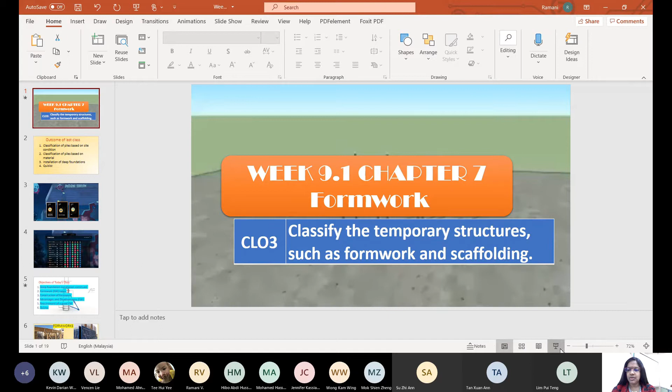Today's class is on formwork, right? We will have two sessions today. Number one is the formwork class, and then another one on how you feel about this course. Your appreciation and clarification questions, whatever is related to any matter in this module, you can ask and I will reply immediately. If I can't reply immediately, I will post later on. We'll do that in the Padlet later on. Let's start with this class today.

Meanwhile, in between, I plan to give you a briefing on another coursework. Okay, this module will have 5 course learning outcomes. We have completed 2 of them. Now we are going to do the third one: classify the temporary structures such as formwork and scaffolding. It will be a separate outcome that is expected out of this module, right?

In olden days, it was content based, how much content you learn. Nowadays, it's very specific to the outcome of each class, if not each class, at least chapters: what you learn with respect to that particular chapter. So today's class, I try to complete formwork, and scaffolding will follow next class, because each one has about 50 to 80 slides. So I may take 1 or 2 classes for covering this CLO.

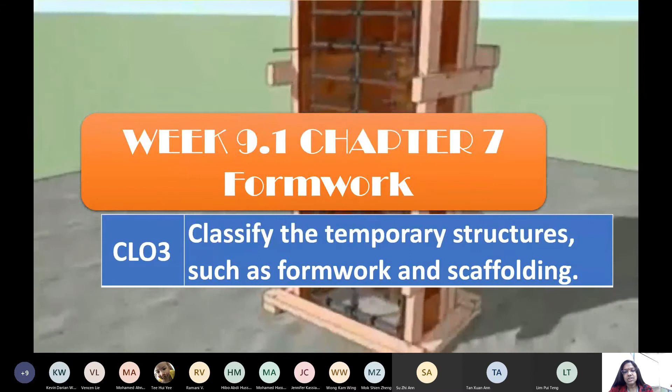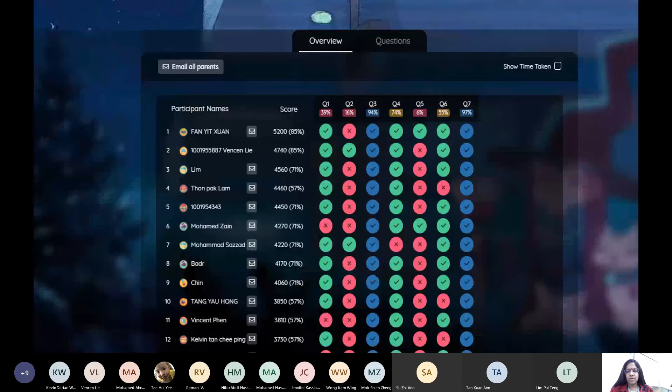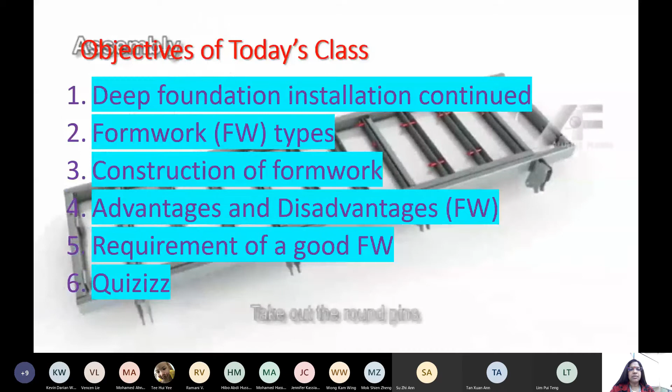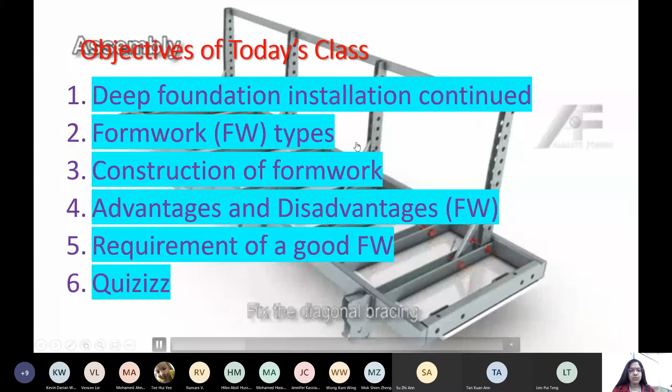Classify the temporary structures such as formwork and scaffolding. Formwork is the one which is forming the structure. One moment. Objectives of this class: construction, deep foundation installation continued. I will do this by reviewing your quizzes from last class. Then formwork, the types of formwork, construction of formwork, advantages and disadvantages of formwork, requirements of good formwork, and Quizizz. Quizizz, if we have time, we do today. Otherwise, we will finish with Padlet.

Can you all hear me? Yes, ma'am. Yes. Okay.

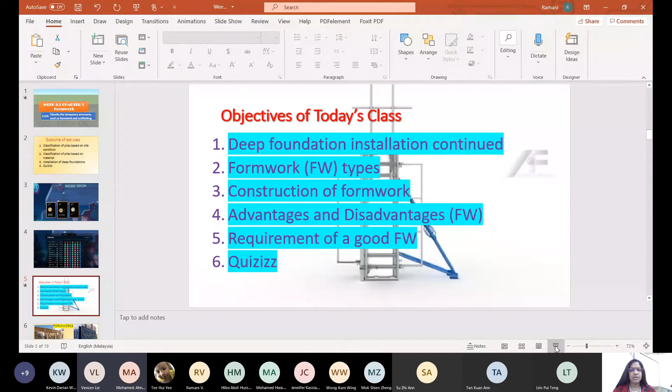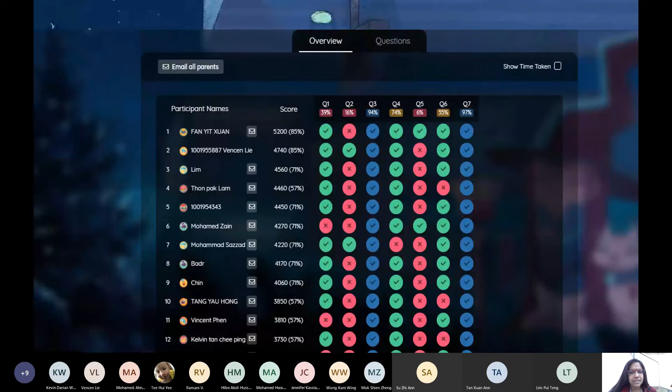Let's do a quick review of last class quizzes. We had 3 people on top. Number 1 is Fan Yit Xuan in first place. Second, Vencen Lie. Third, Lim. Give them a big appreciation by joining your hands. Then the first 10 places in our class on the topic of deep foundations: Fan Yit Xuan, Vencen Lie, Lim, Thon Pak Lam. Please give your name whenever you participate, so that we know each other. Mohamed Zain, Mohammad Sazzad, Badr, Chin, Tang Yau Hong, Vincent Phen, Kelvin Tan. These are the people at the forefront. So try to beat them. Actually, Fan was 3rd or 4th during the session and suddenly jumped to 1st place. Appreciate. Okay, good. Let's proceed with the class today.

Formworks, right? Sometimes I use the board. I don't know whether you can see the board clearly when I draw. Can you answer me? We can see it clearly here. But my problem is I should see either the one you write on the whiteboard or the slide you share. Oh, like that. Okay, go ahead with my iPad. I'll try to manage with this today, then we will see how effectively we can use this.

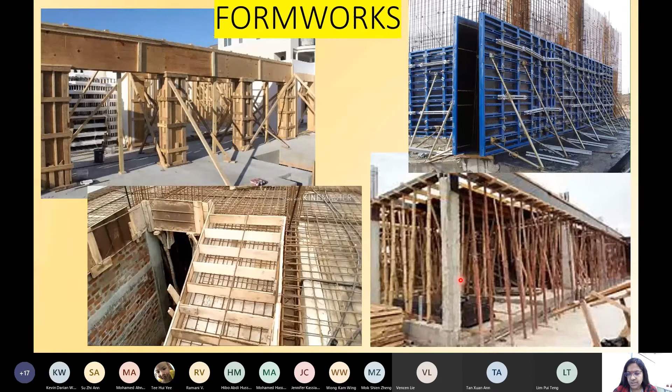Okay, let's come to the section of parts of a scaffolding. I may ask in your assignment or any of the questions, giving the structure, to mark the parts. Okay, just remember these words in English. It's common everywhere. Nowadays it's global, right? Whatever the invention, whatever the material, whatever the findings, all global. The one invented in Dubai, India is using, Malaysia is using, Singapore is using. The one invented in Australia, Netherlands is using, Austria is using. So there is no regional word used. You can use this as a common one.

All places they are called base screw jack, right? This one is the jack. What is this structure showing? Okay, this is the formwork arrangement, the formwork structure used for construction of maybe a slab here. They're going to construct a slab and a beam and column later on, right? Let's understand the parts of the formwork. Start with the bottommost, which is on the ground.

These are all temporary structures. No need of foundation; a proper permanent foundation is not required. So just put it on the ground, supported by this plate, the screw jack base, strong enough to hold the structure above, and then a tower frame, right? A tower, and then different columns are connected by these diagonal bracings, right? Because they're running diagonally, they call them diagonal bracings. At the end or in between the column and the slab or beam, the ends are called beam, the middle part is called slab.

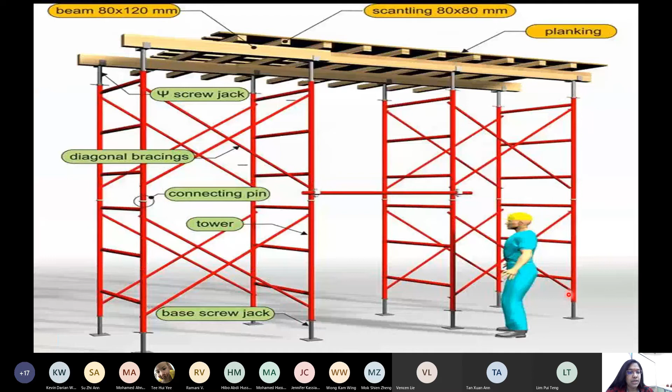These types also, last time you saw this as a pin. The ring pin, connecting pin. Now this one will be like this. I show one video in each class, the rest you please go through yourself.

This is for the column mold. This is they are going to construct a square column, almost similar. This is the mold used for constructing a column. That's why it's very high. It's a box type column.

And these planks are supported by how this column is made, by different planks. The small size planks are put together and they are joined together by these angles, locking pins. These plates are fixed or connected by these locking pins at the corners. At the corners of the square, the locking pins will connect and hold the column.

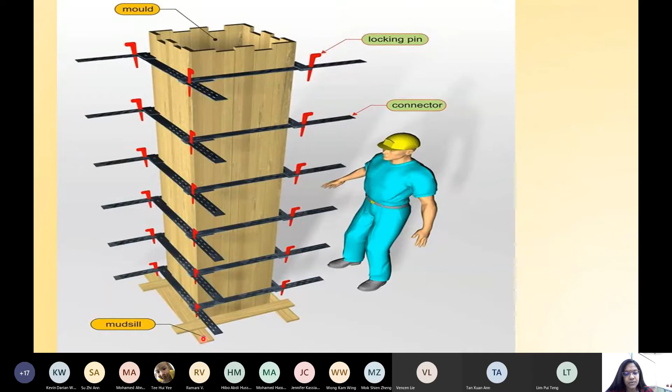At different intervals, stage by stage they build it, connect it using these flanges and the pins. The last one, the bottommost plate is called mudsill, connected like the last one - you have a jack plate at the bottommost. You have here the mudsill, just fixed onto the ground on soil, and then nailed or just fixed firm to the ground.

This is another type of holding, another type of fixing. You have this is a wall. The size thickness - can you imagine what may be the thickness of the walls that you are having? Maybe you take your home, what's the minimum to maximum size of a wall? Can you tell me the size of the wall? Anybody?

Critically, you must think critically, not just listening. 125 to 150. 125 to 150. You're saying partition, only partition. Okay, partially correct. Partition walls, the walls within the rooms within the house may be running about 150 to 200.

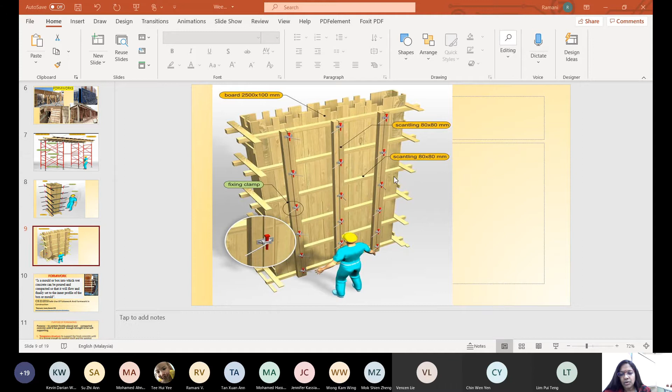That's the size of the wall and they're using here. So whenever you're using the scaffold beneath the formwork, care should be taken that you ensure you maintain correct size, fix it firmly, otherwise continuity is lost. Especially for construction of walls like this, there should not be any joints, breakages, or gaps in the construction. The formwork should be constructed such that the size is maintained, continuity is maintained, no gaps, and material is filled properly.

This is another type of pin, a fixing clamp. They use it as a clamp, and they have a common padlock, like a padlock. They just use a common pad, and then a clamp is used to lock it.

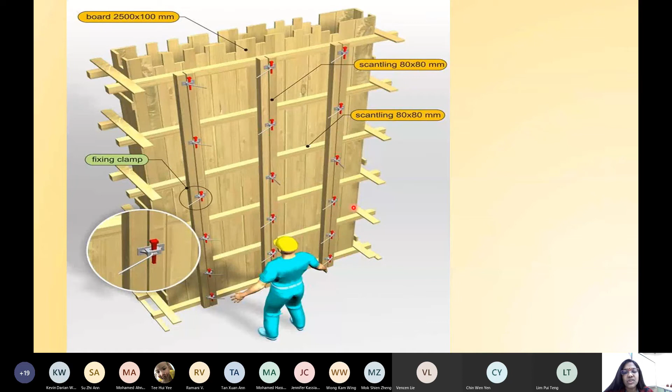All these things are connected by this clamp, fixing clamp. Then it's a mold or box into which wet concrete can be poured and compacted so that it will flow and finally set to the inner profile of the box or mold.

See here, one of the structures. This is foundation because you're seeing below the ground. This is the ground surface, maybe used for pile construction under the ground. They use the formwork.

Into the mold, after making a formwork or mold box, you pour the concrete inside and wait until it settles down. After curing time, say for example, depends on the concrete grade, from 3 days up to 28 days, depending on the structure and the type of concrete.

Which type of grade is it, and the proportion, 1:2:4 or 1:4:8, something like that, depending on the material and the elements, the concrete grade will vary, right?

It's a mold or box, so that it will flow and finally set to the inner profile of the box or mold. So they pour the concrete inside such a way that they fill and occupy the whole end to end of the boxes in all directions, and this is the code you can refer to if you have any doubt.

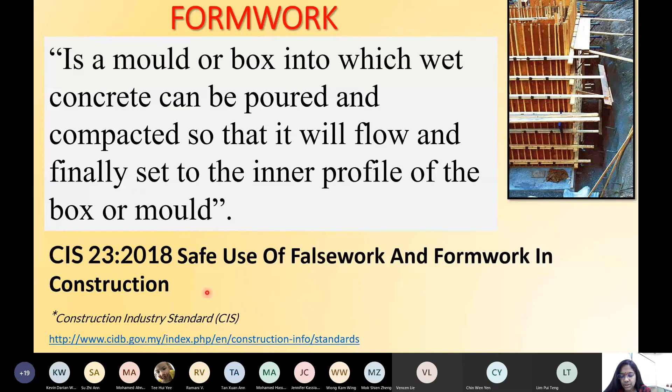Okay, for more reading you can go through. They have given all the criteria, norms and standards for using these types of falsework or formwork. Purpose of formworks: purpose to contain - it is to contain freshly placed and compacted concrete until it has gained enough strength to be self-supporting, right?

Only if it is settled, it can self-support. Then there's no point in keeping this temporary structure there. You can remove the temporary structure - you have a finished final product of your beam, column or slab.

So these are temporary structures to support the fresh concrete until it is strong enough to support itself, reaching the strength of the concrete and the applied load.

That's important. The purpose of making your concrete beams or columns is to support the load, overcoming load, right? It may be static load or dynamic load or any type - starting from wind load, earthquake load, self weight, and all the live loads coming over the building have to be supported by these types of structures.

So depending on the type of loading, depending on the type of location, it will be changing. So you ensure that you achieve this strength by constructing the particular member, and the purpose of bearing load is ensured or achieved.

To produce a concrete member of a required shape and size, we use formwork. If there's no form, no definite boxes or mold, it will go into a different or irregular shape and size.

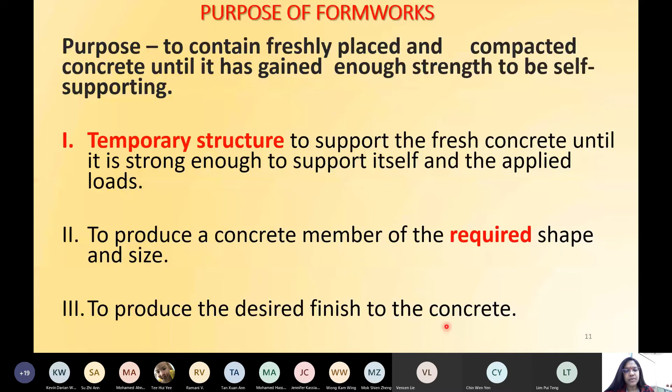For that, you should use proper formwork for achieving the size and shape, to produce the desired finish to the concrete. Not only the size and shape, but desired finish - a smooth surface, a straight surface, a uniform surface for better view, a better architectural view, and then also for other works like finishes. When you apply finishes, you won't incur more cost on the finishes. It will be good enough if you have a uniform surface made out of this concrete by using these formworks.

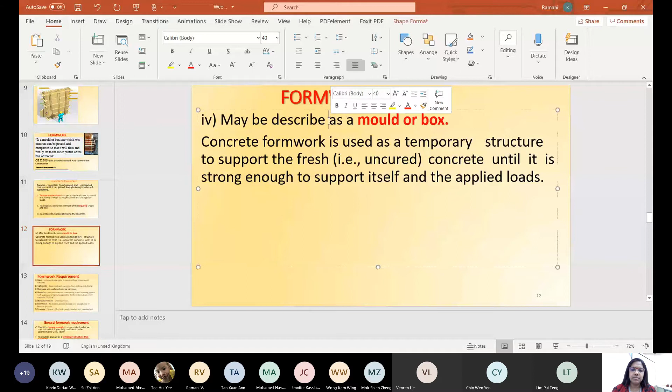Concrete formwork may be described as a mould or box. It is used as a temporary structure to support the fresh concrete until it is strong enough to support itself and the applied loads. You have to wait until it settles, and then only you can remove your temporary boxes.

Formwork requirements are also most important for your learning. What are the requirements of a formwork? You cannot just build it like a layman. It should be proper, especially since nowadays you are getting many types of materials. Whenever you go for new or modern materials, make sure all these requirements are fulfilled. I collected this from 3-4 sources and put down this information as a comprehensive summary for you.

There are only 7 requirements: rigid, tight joints, shrinkage and swelling should be minimum, simplicity, standard size, form finish, and economy. In future, one of you, like our friend Fanit, may do research on new innovative material for formwork - make sure all these 7 conditions are fulfilled. The material should have tight joints, be economic, and have a standardized size, because size also matters. Depending on the loading, sizes vary, and the strength of the formwork follows. If it is not strong enough to hold the concrete, it will collapse, and the whole structure will collapse. So make sure all these conditions are fulfilled. It should be rigid to prevent bulging or movement.

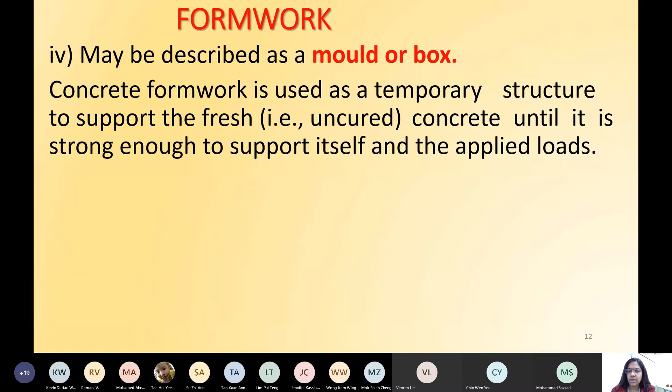It should be rigid to prevent bulging or movement from pouring wet concrete. So it should be rigid, strong enough to withstand the load - people moving, right? Sometimes on the first floor or second floor, people are moving, and it should be able to bear the weight of people moving, coming and pouring the concrete. As the height goes, the weight will be changing. All these things should be managed, strong enough to hold, by the formwork that you design.

Tight joints are needed to prevent wet concrete from leaking, and to keep it strong. At joints, there are chances of leaking. If you have tight joints and smooth finishing, you can avoid such leakages and wastage of concrete.

Shrinkage and swelling should be minimum. Material-wise, due to dry and wet seasons, there is a chance of freeze and thaw. You should be able to decide what type of material it is, whether it can withstand this shrinkage and swelling with respect to the climate. Then, simplicity - easy erection and dismantling.

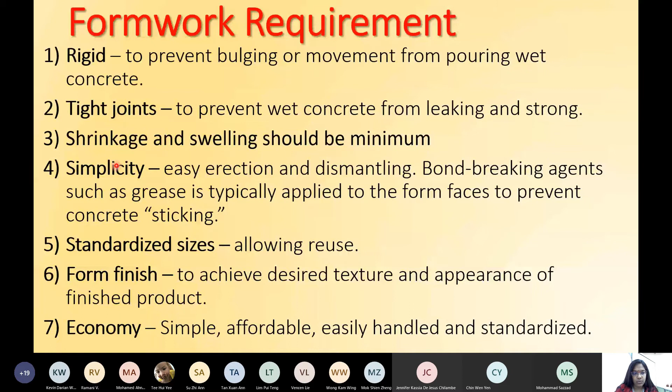Okay, in the first place, if you fulfill this requirement there is no problem, right? If the form has a smooth, uniform finish, there is no need of grouting or any leakage. You can avoid leakage by having smooth joints, perfect joints. You can avoid leakage and any difference in size and so on.

Same goes here. What if you have a joints problem and it is not tight? Grout tight means grouting is an operation to remove all the gaps, the air pockets, mainly the gaps at the joints. So grout leakage can cause honeycombing. If there is any gap or holes at the joints, it will form a type of honeycomb.

You know the honeycomb, right? Have you seen honeycomb? Small holes, which is ugly, and that will yield poor strength of concrete. There is a chance that the structure will fail through these honeycomb portions in the concrete. So you have to avoid honeycombing caused by loose joints. You should have tight joints and avoid honeycombing, and then it will start forming fins, spreading, and that has to be removed, right?

Grout leakage can be prevented by using sheet materials. How do you remove this type of defect in case it is unavoidable and it has occurred? Number one, you should identify it. If at all you cannot make a good finish with perfect joints, check the joints, right? Check the joints.

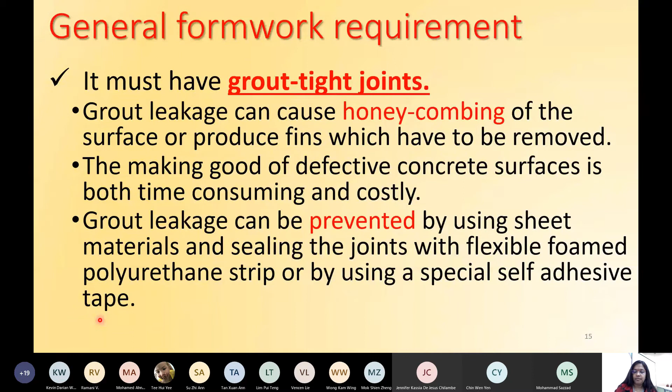General formwork requirement. It must not be able to deflect under load, which would include the loading of wet concrete. Just now we studied, it should be capable of withstanding all types of loading coming in, right? It should not deflect, change, move, dislocate, and so on when you pour concrete. It must be accurately set out, right? Accurately set out. Size should be correct.

Concrete being very soft when placed, it will take up the shape of the formwork, right? That's the purpose of formwork. So if you are constructing a 4 by 4 beam, your formwork should be 4 by 4, not even 1 mm differing. It should be exactly 4 by 4, right? So when you pour concrete, you will get a 4 by 4 beam accurately set up to the size you designed.

Concrete being very soft, it takes up the form, which must therefore be of the correct shape, size, and in the right position. Because it is going to take the shape of the beam, right? The ultimate product, the beam or column. You should mind the shape, size, and positioning of the formwork. The example I want to show.

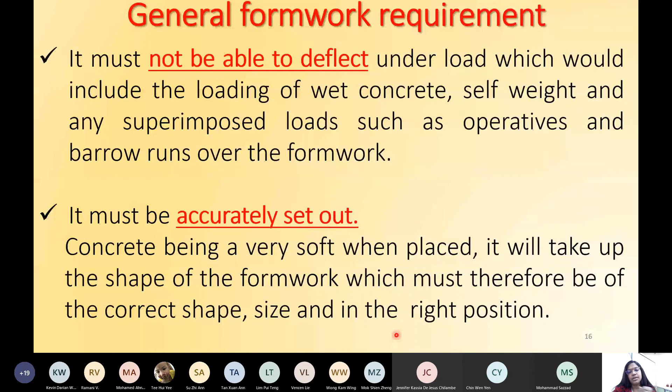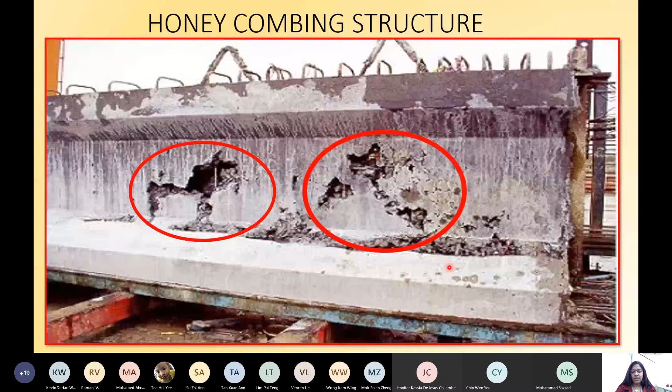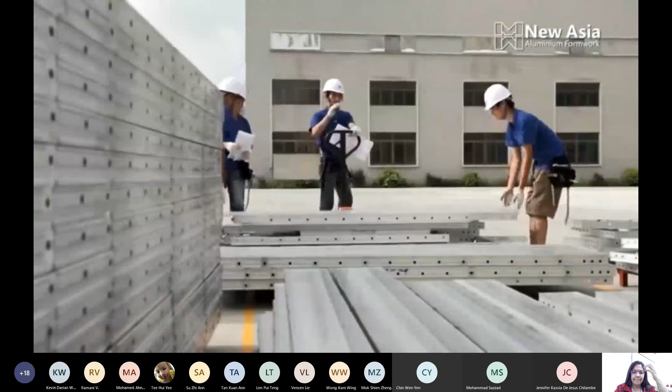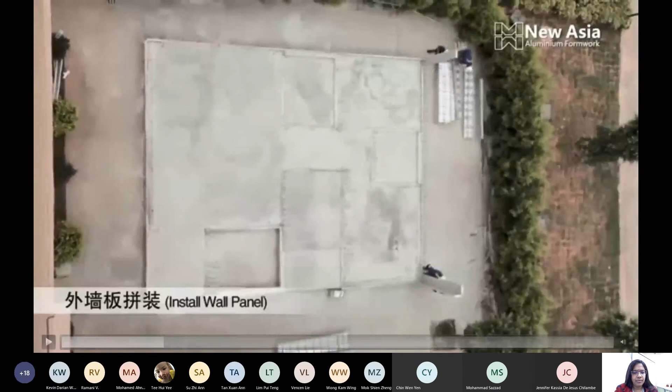There's a video based on this formwork. Please listen to this one. One moment, I will share it. It's a nice project in China. That's why I brought it here. You can go through. You can see, right? One moment. You can watch later, but this is repeating somewhere.

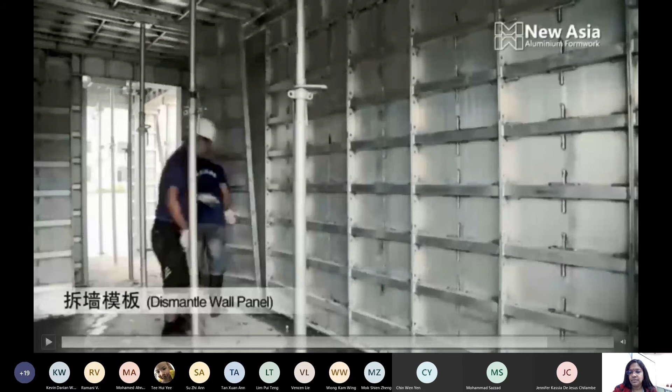Thanks for watching the video. Can you tell me what things you saw in the video? Are you hearing me? What things did you saw in the video? One by one, quickly. Hello? They poured some mold oil. Installing formwork. Aluminium formwork. Very good. They use aluminium. They pour concrete, and there's another answer. Quick, one by one.

Dismantle the formwork after setting. Okay, by mechanical means, like just unscrew it or break it, right? Break the pin or unscrew it. They open it. Any other things you saw in the video? Important thing. They coat oil on the formwork. Apply the oil purposely so that there is clean removal, and when removing, it will be easy to remove. Oh, very good. Next, chemical, it's not oil, chemical. Any other? Quickly, 2 more minutes.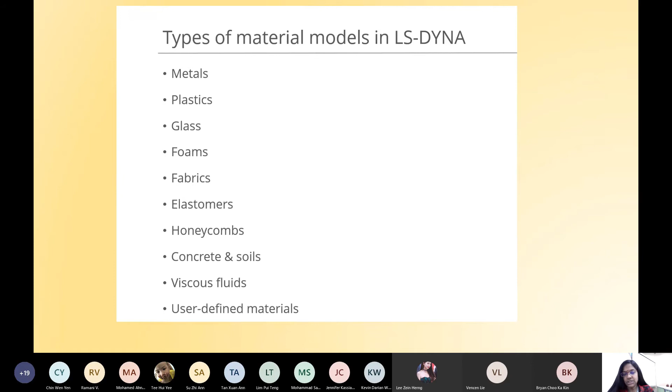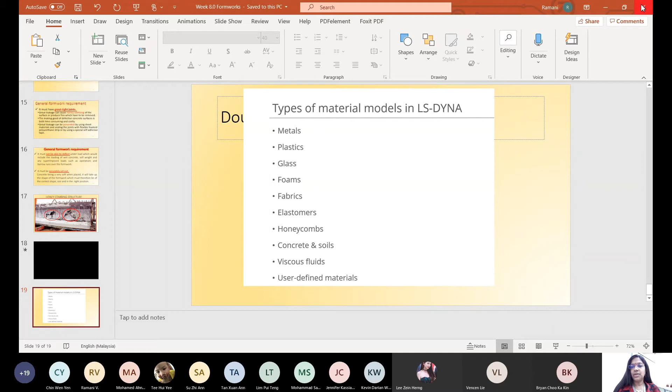Yeah. One moment. I open the file. Any questions so far? No question, ma'am. Okay, one moment. I take the next slide for you. Now we are going to see the requirements of formwork. This slide is over. Based on the requirements, it's all about construction only. Your slides are delayed. One moment. This is week 7, right? 7.1. Okay, I start from here. Requirements. I can't find the slide. Seven is not coming. One moment. I open from the folder.

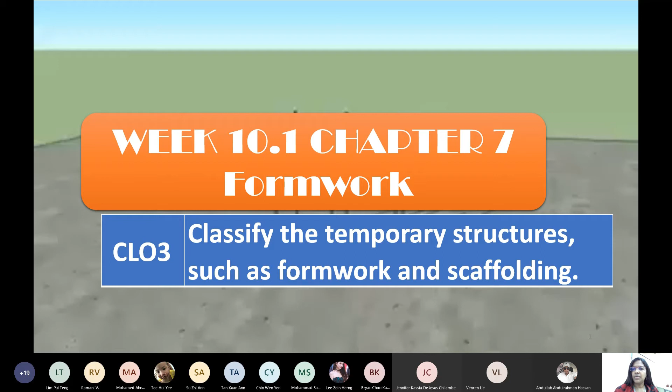You can't see the slide. Why is the old one always coming? I don't know. One moment, sir. The old slide is coming. What's happening? Give me a minute. I got it now. Maybe overuse of sharing. Right, we are here.

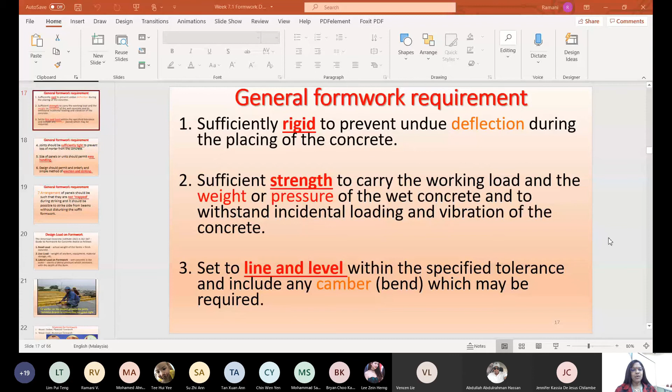General requirements, mainly for designing and construction of the formworks. Sufficiently rigid to prevent undue deflections during placing of the concrete. Sufficient strength to carry the working load and the weight and pressure of the wet concrete, incidental loading and vibrations, because after pouring concrete they use vibrators to consolidate the concrete, settle down the concrete.

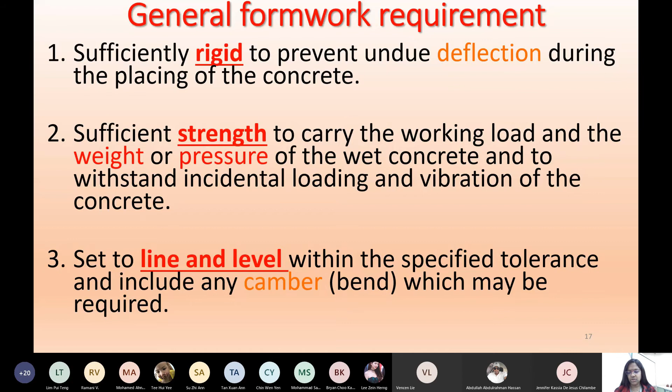Set to line and level within the specified tolerance and include any camber which may be required. So a smooth and uniform finish should be there. It should be in line and leveled, not undulated. If it is a wall, the surface should be leveled, not undulated. Joints should be sufficient. We already did this one, right? Maybe I put it in a detailed way.

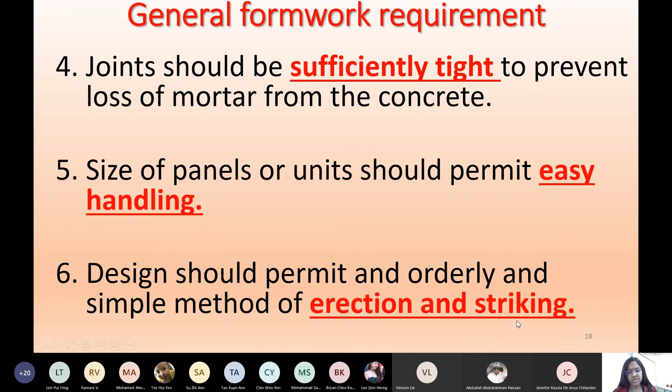Size of panel units should permit easy handling, erection and striking. Design should permit an orderly and simple method of erection and striking. So handleable, manageable, simple. Arrangement of the panels should be such that they are not trapped or leave any gaps during striking, and it should be possible to strike sides from beams without disturbing the soffit formwork. Soffit means the bottommost portion, which should be clearly finished, closed while striking one by one.

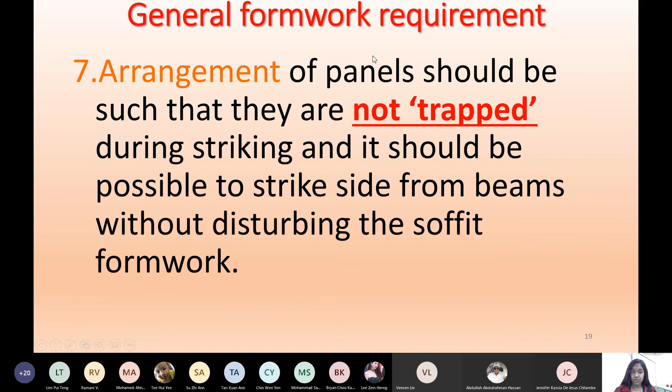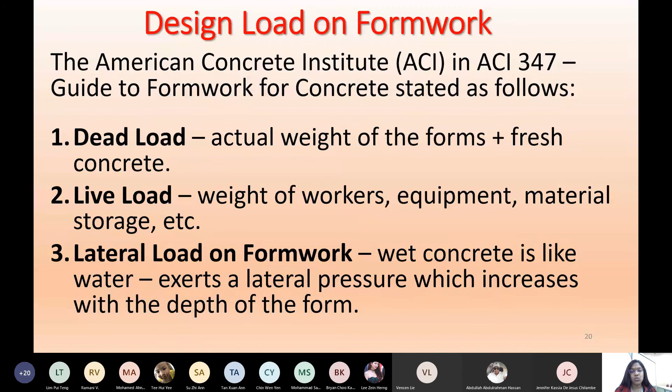As you pour, because it is a slurry form, liquid or semi-liquid, it will try to find ways to fill inside the formwork. Wet concrete is like water; it exerts a lateral pressure which increases with the depth of the form. It is not only static load, that is gravity load, that is applying; it is also lateral load while it is filling and increasing the load towards the walls. So it has to support lateral and vertical loads.

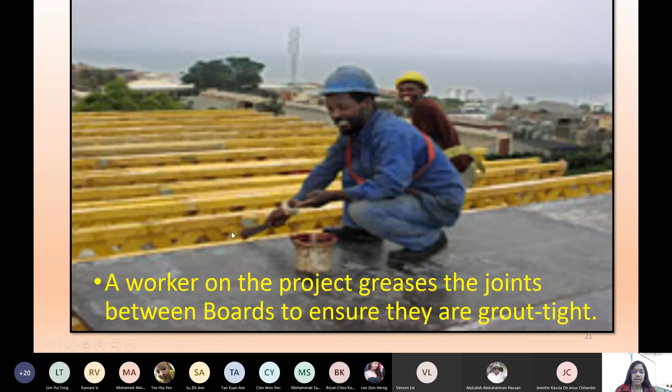What is he doing? Already written there. A worker on the project greases the joints. It's a formwork. He's greasing the joints so that the removal of formwork after the concreting will be easier. He's greasing the joints between boards to ensure that they are grout tight. Grout means a gap or loose joints like that. So it is grout tight, and then it is packed with the concrete later on.

Come on, let's classify the formwork based on the material. Let's understand what are the materials, what are the advantages and disadvantages. Now you are learning the theory, but when you go to the site, there are many things you need to consider. All types of ethical, technical, managerial problems will arise. You have to manage, right?

One moment, sir. This phone is ringing. One moment, sir. Give me a minute. Okay, sorry for stopping.

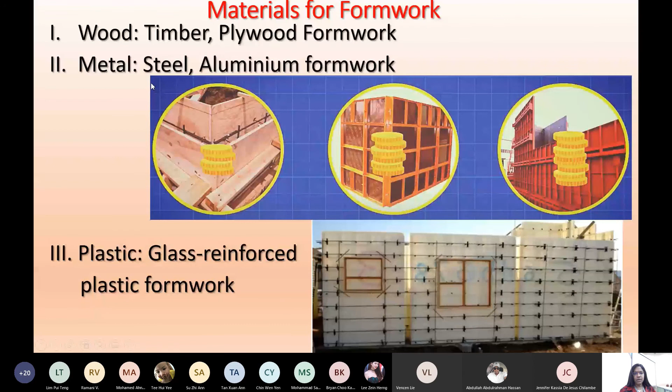Timber formwork. Let's analyze one by one: the advantages, disadvantages, the strength, they are varying. See here the example, timber. Using timber, they support the structure we're going to construct. Basic standard qualities of timber formwork: reasonable, affordable price, and readily available. Should not be so soft. Should be easily worked by hand or machine, or nailed easily. Workability, customizing to your required size, is easier. And should be stiff to avoid deflection.

The timber you choose has to be very stiff. Choose the right type of timber material; timber has many classifications. Should be stable when exposed to sun or rain. Not low quality timber, high quality timber, so that the weather and climate problems are not there. Should reduce defects, like honeycombing, or white patches on the surface after repeated wetting and drying. That should be avoided. Growth of fungus and so on.

Not suitable for green timber. Moisture content not more than 20%. So avoid green timber, and moisture content should be less than 20%. Up to 20% is bearable. More than that is difficult to manage.

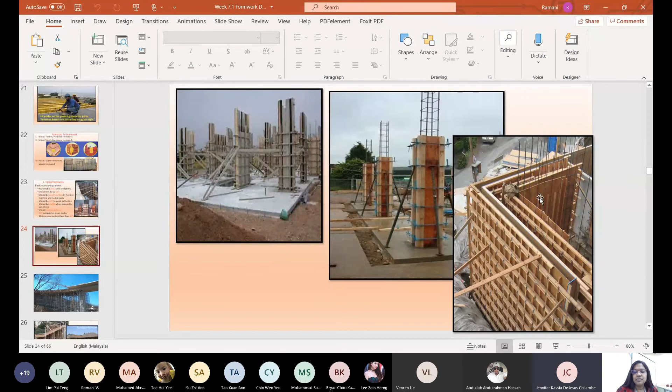Disadvantages of timber. These are the requirements. Actually, this slide says the timber you are choosing should be affordable, not so soft, easily workable, strong enough, stable, right? Not very light and fly away. When you pour concrete, reduce defects. You prepare the wooden planks and ply panels from the mill; in that case, avoid any defects, right?

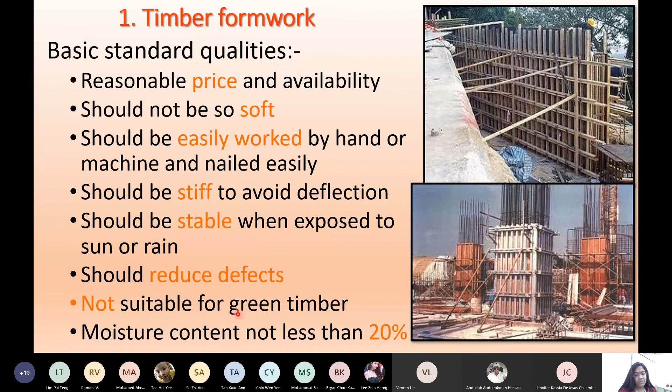And then green timber is not suitable. Avoid green timber. Use dry, handleable, good quality timbers. Moisture content should be 20%. All these things are requirements. On the other hand, there are some defects. That's why we have to go for some other material, which might be metal or polymers. Okay.

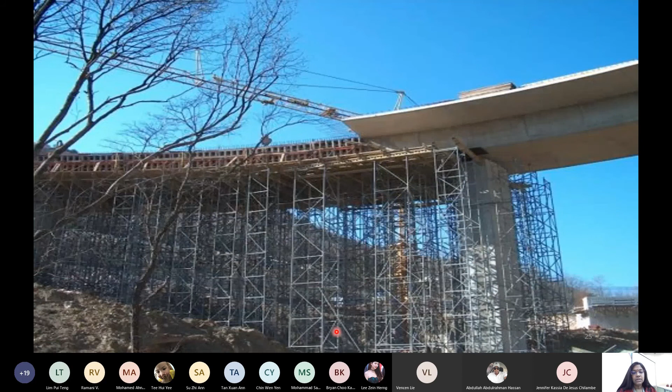And this is another one. I don't know where the timber is, somewhere here. Only for the slab they are using it, because of the very high height. So they use steel as scaffolding, but for the slab they use wooden planks. It might be the Singapore one, the Gardens by the Bay near the Singapore airport. This photograph was taken during construction.

And the next one is foundation formwork. See here, timber successfully used for foundation formwork. Number one, this one is a staircase. Timbers are used; a staircase has reasonable weight, not so heavy, so they can use wood as formwork material. And here he's preparing a small veranda or front yard for this house with the slab, and these are the timbers used to support the slab construction, with the bracings and side bracings.

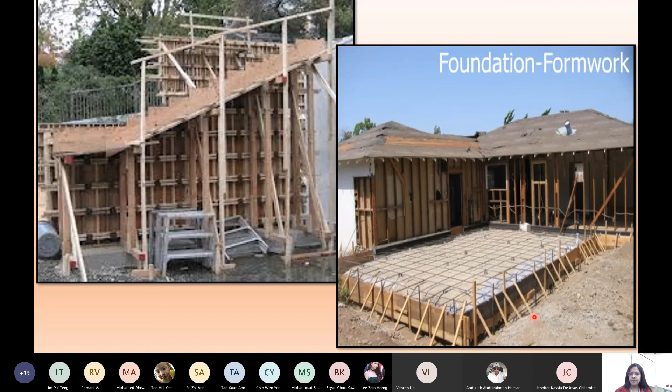Advantages: easy handling because of its weight, easy to dismantle. Dismantling needs no very high force; at times that may even break your concrete member. So dismantling should be easier whenever you choose a formwork. Damaged parts can be replaced with new ones because of the affordable price. Very flexible, more economic, easy to handle and formed into the required shape. That's most important.

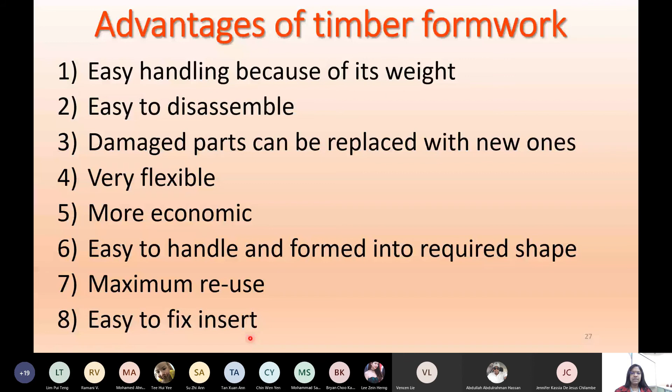If it is steel, you see how hard it is to customize or change to your size, right? Either cut or adjust, it's difficult if it is metal. Maximum reuse; it lasts a reasonable number of years, like 2 to 3 years. Easy to fix and insert. Because of the nailing, assembling, forming and dismantling, the workmanship is relatively easier. The joints can be fixed quickly.

At the same time, you should look into disadvantages. These are all important for your lessons, for your exams and so on. Please make note of it. Formwork will mostly be classified based on the material, and it will come in the exams, remember.

So disadvantages of timber formwork: it can't be used for long because it's not strong enough to withstand the loading for a repeated number of uses. It has limited reuse, maybe five or six times. If the project goes on for a year, the 5 or 6 uses finish. If the timber is dry, it will absorb moisture from wet concrete, which could weaken the resultant concrete member. The consistency of the concrete may change.

Consistency means the amount of water present in the concrete, and workability and consistency are related. They prepare the concrete such that workability is achieved with sufficient consistency. If consistency is lost, automatically the strength of the concrete will be lost. Care should be taken that the wet concrete should not become dry because of the absorption effect from the timber surrounding the formwork.

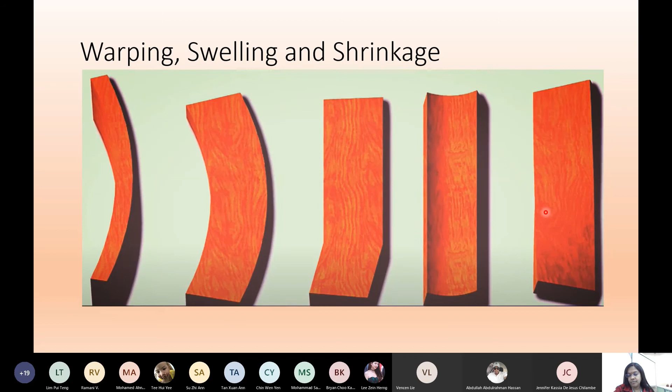There is always a risk in using these types of materials in making high-rise buildings or for long periods of construction. Hence, you have to go for metal formwork. Any questions so far?

No question. Okay, I'll leave a break.

So timber can't be used to construct a high-rise building because it's too heavy? The number one factor is strength. You cannot use it because of the load—high-rise buildings will have heavy loads, heavy weight of structure coming onto the formworks, so it will be avoided. It will be hardly used for that.

You see, they use timber only for slabs. All the scaffolding, bottom beams, and columns will be made out of metal. Wherever the load is relatively less, you can use timber, and where the duration of construction is also less, you can use it—like for bungalow type residential buildings, two stories, a small workshop, or an industrial building with one floor, 1+1, can use wooden formworks and scaffolding.

If it's high-rise or multi-story, you must go for steel due to all these defects and problems. Instead of attending to these problems, you can spend a little more money to get steel, which is strong enough, with some disadvantages still there, but that can be managed compared to fixing the problems due to timber for high-rise or multi-story buildings.

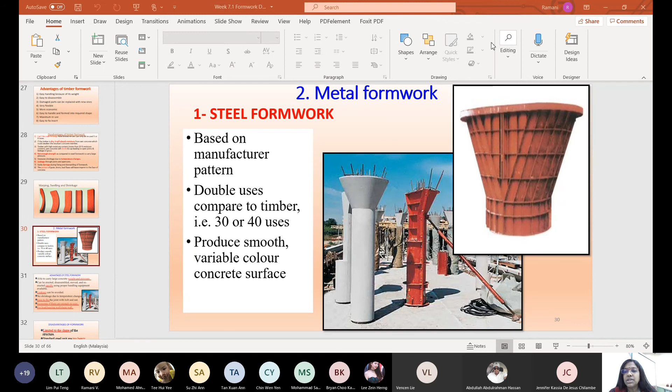This one. Eh, can you see? Yeah, you can see.

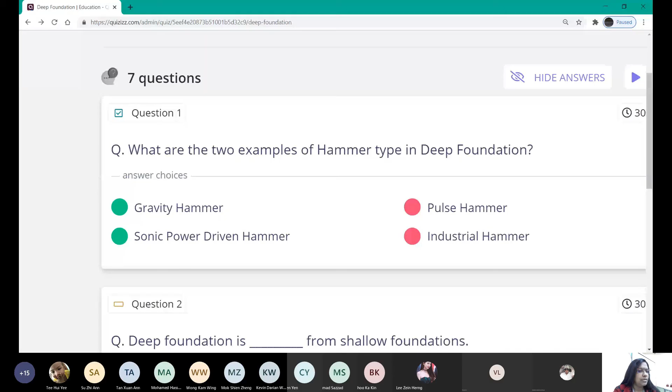What are the two examples of hammer types used in deep foundation? It was asked all these things, right? The right answer is the green one: gravity and sonic power driven hammers. Not these types used in deep foundations. Please make note of this: gravity hammer and sonic power driven hammers.

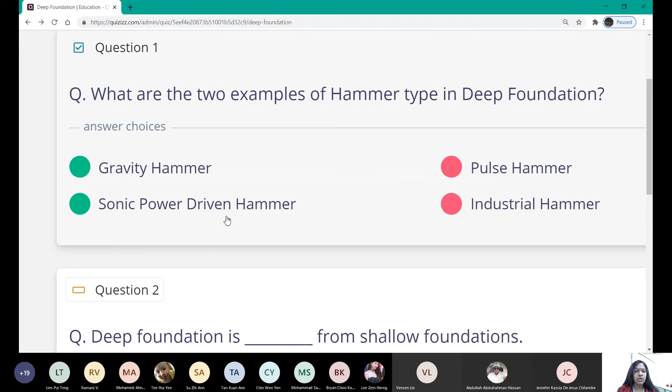Deep foundation is distinguished from shallow foundation. Your answer may be it is differentiated from or distinguished from shallow foundation. According to the site condition, you may have to change it. Deep foundation can be made out of multiple shallow foundations, one after another. Or made out of a bottommost slab, and then a small slab like shallow foundation, on top you can construct deep foundation. Chances are these two answers are the alternatives: can be made out of or made from shallow foundation.

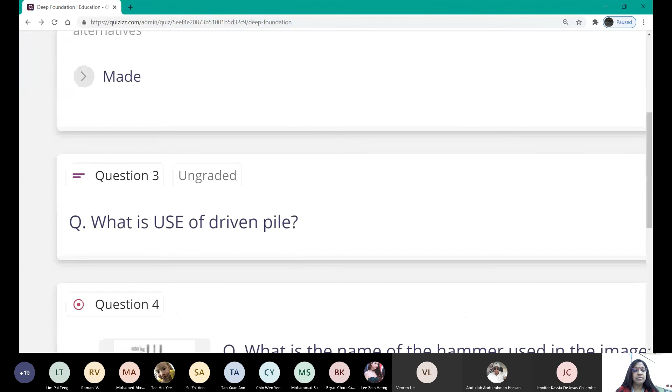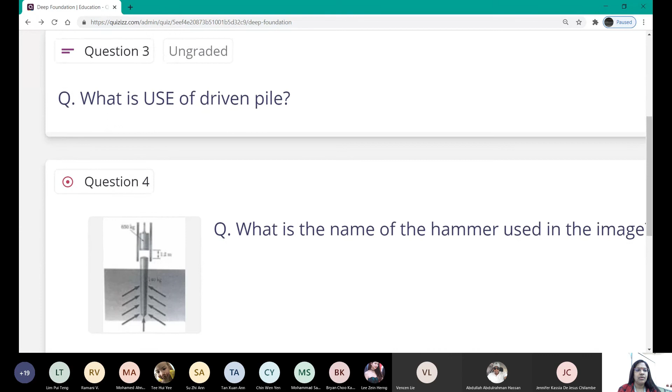Are you following? And then what is the use of driven pile? Is the question right? One moment sir, let me give the answers.

It is there, okay, where is this? Here. In driven piles, reinforced concrete is used. So the answer may be reinforced concrete. You go for reinforcement steel with concrete whenever there is a high-rise building, right? You cannot just go for plain concrete, chances of brittleness, chance of cracking faster.

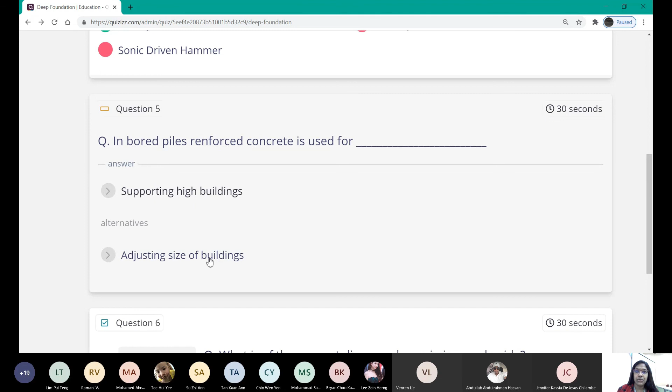So you must go for supporting high-rise buildings by means of reinforced concrete type piles, or otherwise adjusting the size of the building. Whenever there is a need for adjusting size, if you have precast piles, you cannot cut according to the size and requirement at the site. It's good if you make it at the site using concrete. That's why we go for reinforced concrete, it's easy to adjust according to the size and height of the pile required.

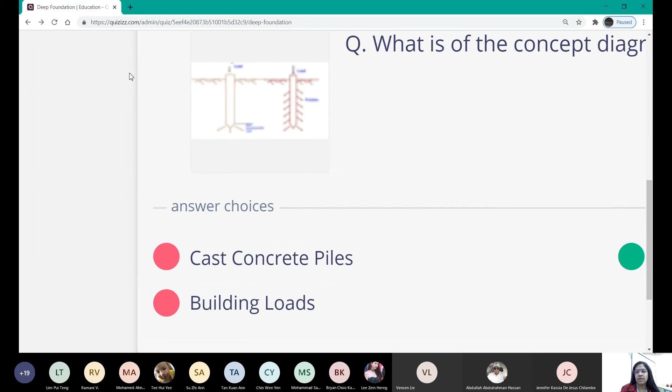And then this question, most of you get wrong. Don't you remember this? What is the concept diagram showing here? I think you have a nice diagram here like this. Can you see? Yeah, see these two types of drawings. I don't know whether I can use it... okay, I cannot use my mouse.

Okay, the first diagram is showing what? Can you answer me, what is the first diagram? Quickly, what is the first diagram saying? Su Zhi Ann, is she there? No. Zian, what is the first diagram? Can be wrong, don't worry, you can switch, right? What is the first diagram?

End bearing pile, very good, very good answer. See, it is the first one. Second one, anybody else? I will explain next. Maybe Mok Zi Zeng, Mok Xian Seng, what is the second diagram saying?

She answered very correctly the first one. Second pile, what is the second pile? Can you all see the pile? You can see, right? What is the second diagram quickly? Anybody? Friction pile. Very good, friction pile.

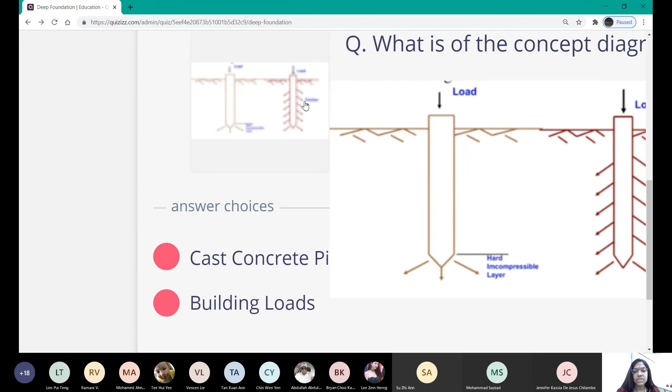So the pile, how does the pile distribute the load of the superstructure? By distributing it through resistance offered by this rock material at the bottom. Okay, that's why it is called end bearing - the end is distributing the load to the rock surface. By means of that, the structure is supported here only by the friction of the pile and the material surrounding it, the ground or earth material surrounding the pile. So this one is by friction, this one is by end bearing - the load distribution method.